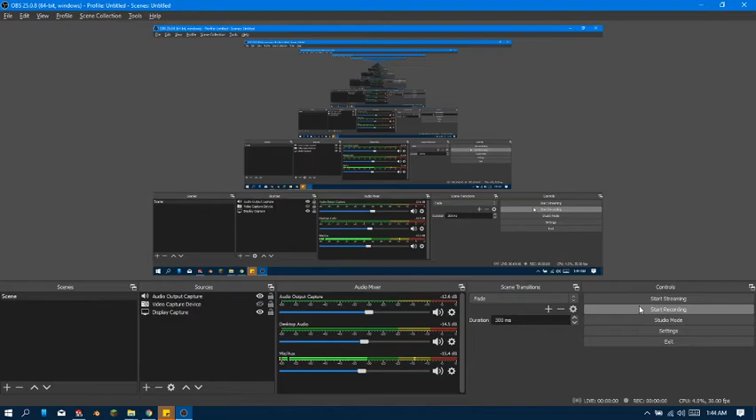In this series of videos, I will be explaining how I made the major components of this engine. It won't be as detailed as this engine, but it will cover our requirements for Activity Number 1 for Power Plant Lab 2.

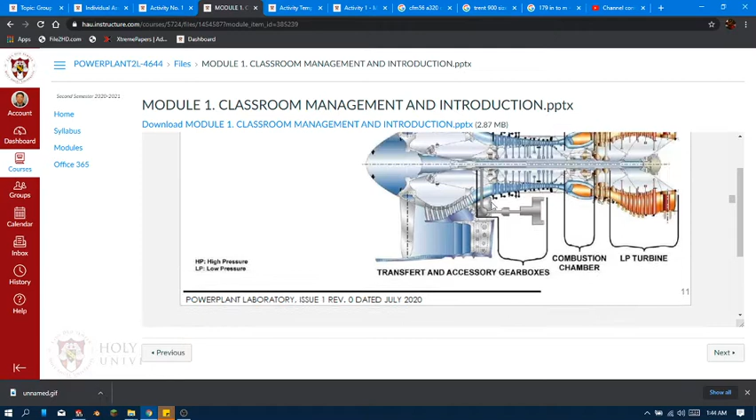For this activity, I will be covering how I made my fan blades, my fan, my low pressure compressor, high pressure compressor, combustion chamber, low pressure turbine, exhaust, and the whole engine.

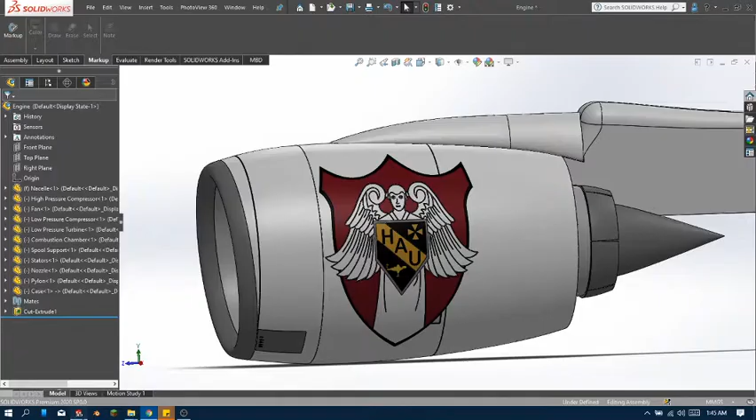For that, we don't really need the nozzle, so let's go ahead and hide the nozzle. And we are left with the case. We also don't need the pylons. Oh, by the way, this is my CAD 1 project.

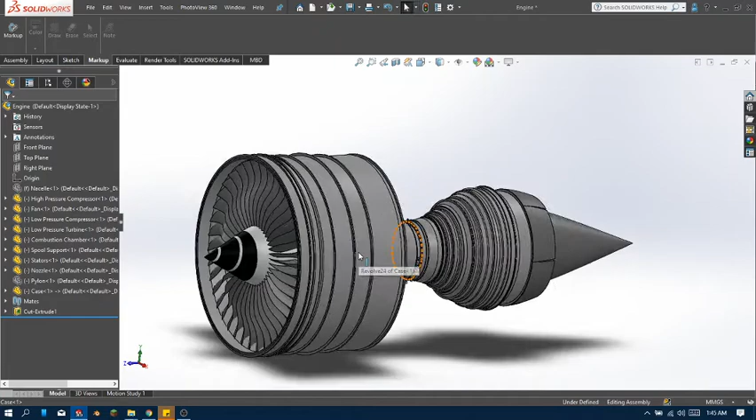This is the design that I built - this is a Trent 900 engine, which is designed to be mounted to the Airbus A380. I did this for CAD 1, yes you heard that right. It's an overkill, but that's alright, I learned a lot in making this.

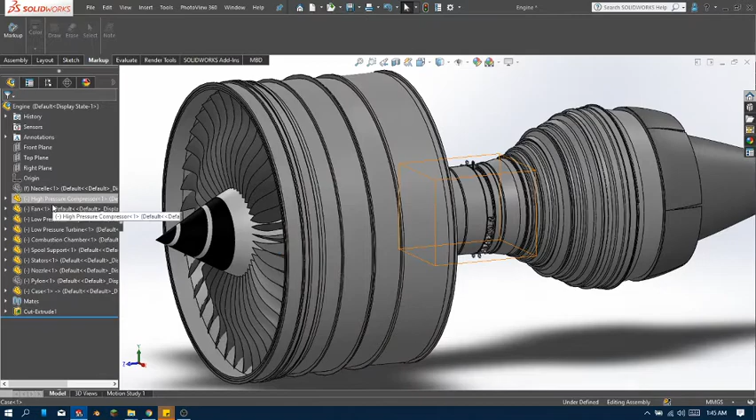So anyways, let me show you guys around what this thing is made of. I already showed you the nozzle and the pylons, and this is the case. Let's go ahead and hide the case as well, and now let's get into the juicy parts.

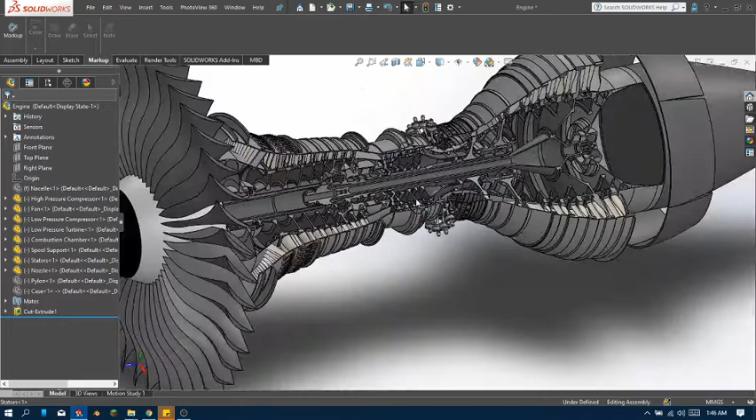This looks really complicated, it looks super detailed. I mean, look at that, it looks really detailed, right? But we're not going to be doing all of this.

First off, let's hide the stators. The stators are really a pain because these things have a crap ton of blades, as you can see. This took me around 4 to 5 days just to complete.

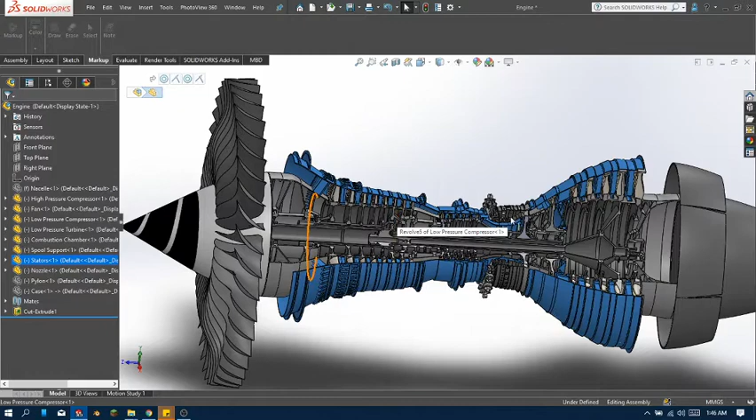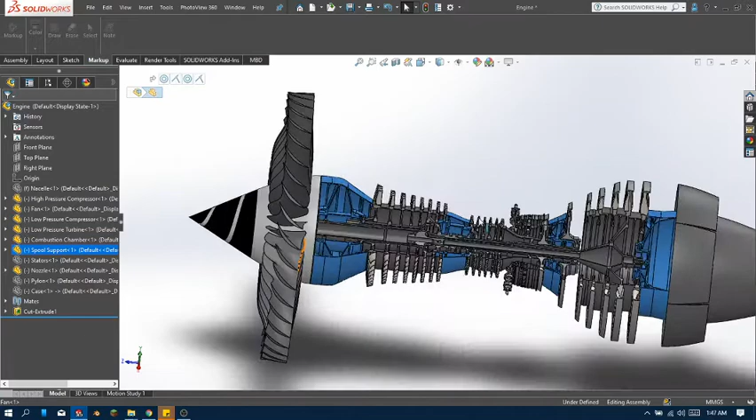So we're not going to be doing that in this series of videos. Instead, we're going to focus on how I made the main parts. We also don't need the spool support - this thing in between our major components is called the spool support. They are support, basically, so let's go ahead and hide them.

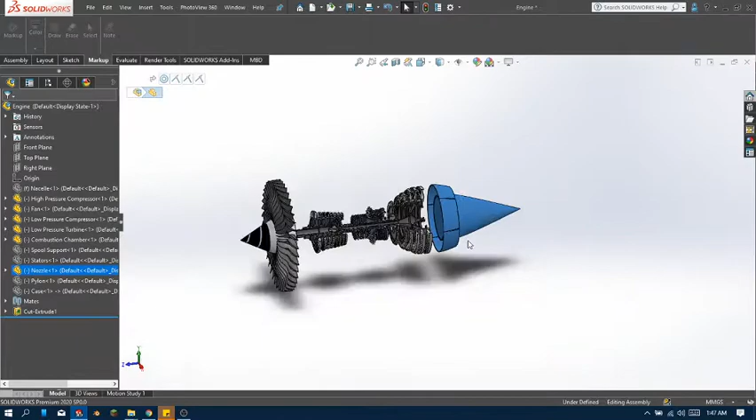What is required of us for batch 8 is the fan, the high pressure compressor, low pressure turbine, combustion chamber, and exhaust. It says exhaust, but for me, I named it as nozzle.

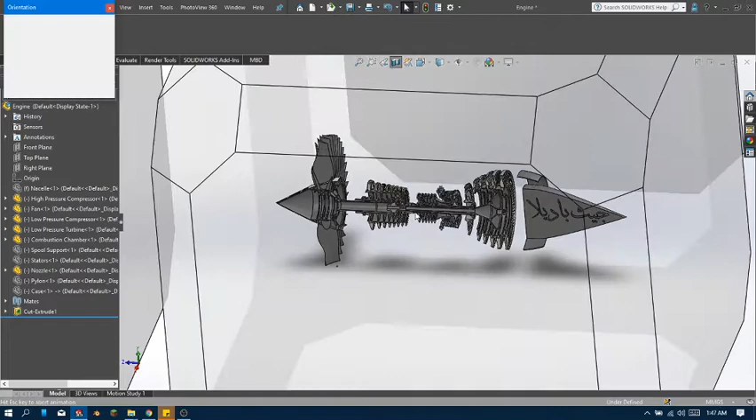Alright, so let's cut this thing in half, and then I'll show you guys what it looks like from the side view. Let's take a look at this from the side view.

So yeah, this is what we are going to be doing - the final thing. This is what our final output would look like, like a skeleton of the engine. It's not going to be as thick as before, but that's alright.

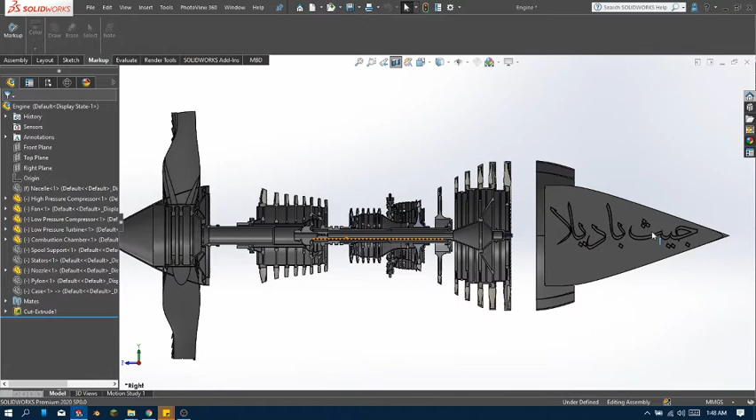A lot of you guys have been asking me before, what sort of caveman language is this? This is Arabic, that's my name in Arabic - Ja, Ya, Tha, Ba, Alif, Dal, Ya, Lam, and Alif. So that's Jeff Padilla, which is my name. Hello, nice to meet you guys. I added that in as a sort of Easter egg, but we won't be doing that.

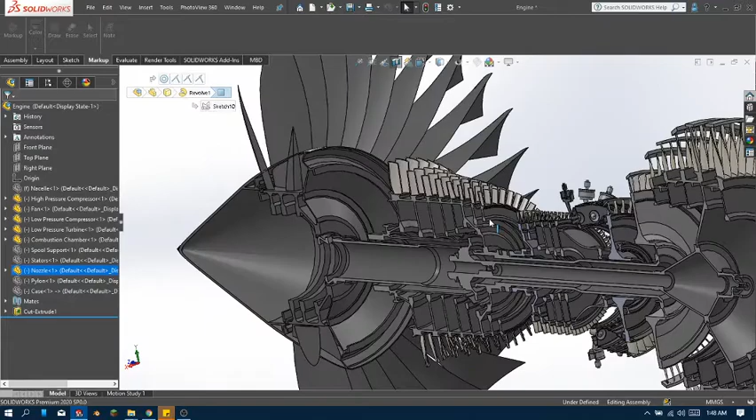Instead, for the nozzle, we're just going to be creating a straight up cone. We won't add extra designs such as this. Also for the low pressure turbine and the high pressure turbine, if you look at this, it has some sort of disc in the center, but we're not going to be doing that - we're just going to be creating a solid cylinder.

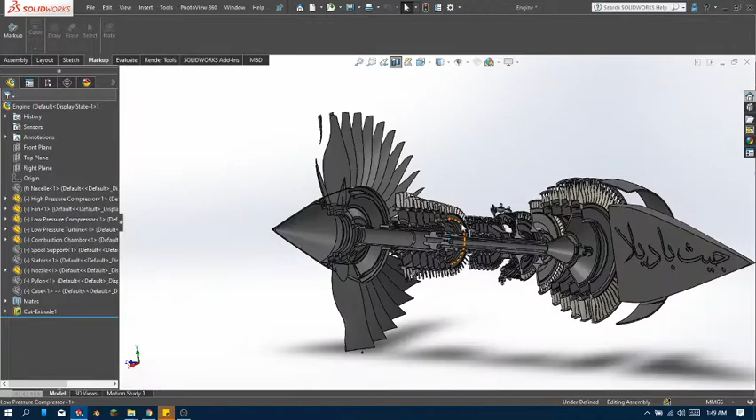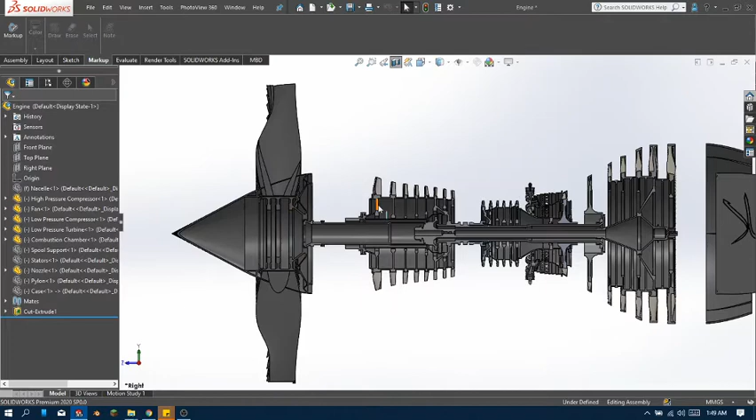What else? So yeah, hopefully you guys stick around. My first video will be the fan. My second video will be the low pressure compressor.

Right now, when I press low pressure compressor, it's including the high pressure compressor over here - this is the high pressure compressor, it's not part of the low pressure compressor, so we're going to be chopping this somewhere here. And then we have the low pressure turbine, which is this whole thing, and then the combustion chamber.

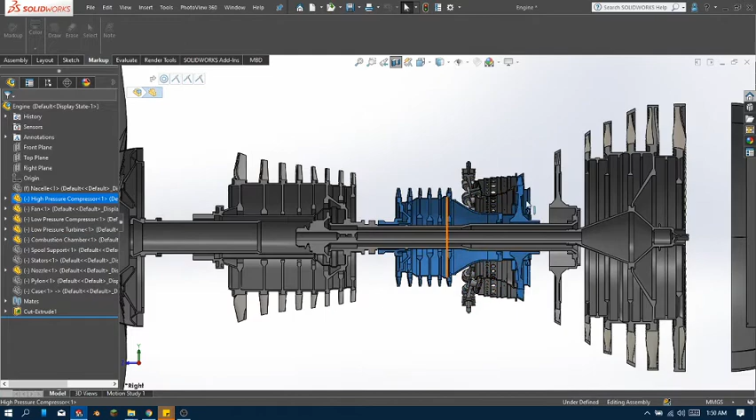I'm going to be doing the combustion chamber last for the series of videos. The high pressure compressor also includes the high pressure turbine over here - so these two objects are high pressure turbines.